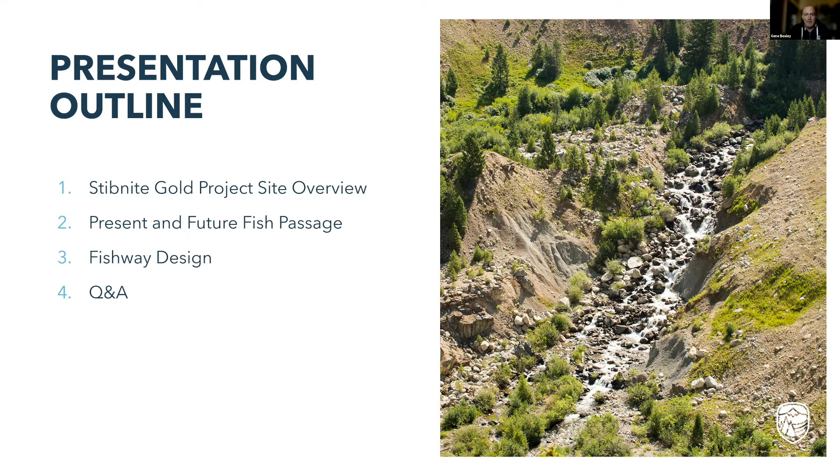So briefly, the project. Most of you probably know this, but it's in central Idaho, east of Cascade and McCall. One key constraint about building things at site is it's quite a ways in. We're about 37 miles from pavement or something like that.

And we'll be building an access road to get into the site using a few present Forest Service roads, but also some pioneered section. That's a whole webinar in its own right to discuss the Burnt Log Route. But anyway, suffice to say, we're pretty far into the hills and in some rugged terrain, and we'll get into some of that a little bit later as we talk about the tunnel and construction.

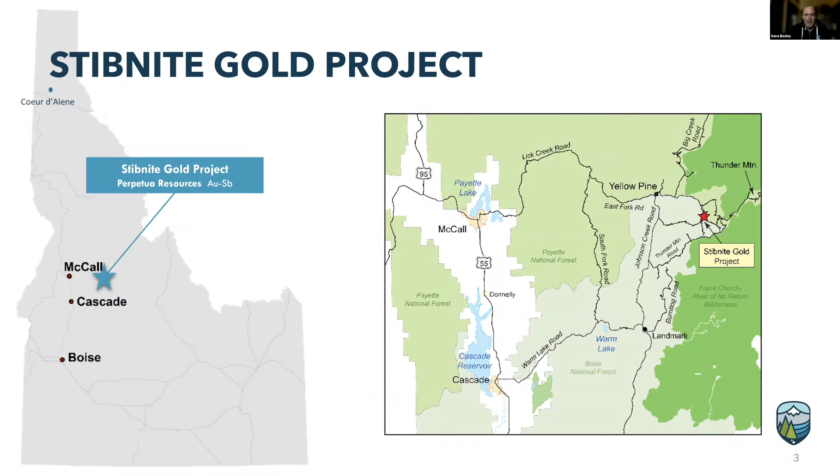The site, of course, has been mined for almost 100 years, off and on, and that's left a few legacies. We started out in the 30s, 40s, 50s with some pretty heavy mining activity associated with getting, in a lot of cases, war material. It was a major source of tungsten and antimony for the Allied war effort. Then the site settled down a bit after that, was abandoned and reactivated in the 70s through the 90s. That was focused really on heap leaching of oxide gold, and abandoned again, essentially.

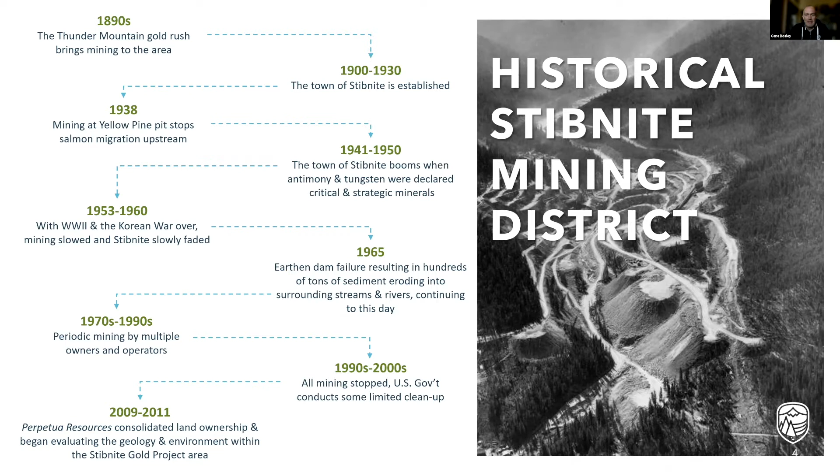And then some limited cleanup efforts were undertaken and left the site where it presently is, where it's better than it was in 1955 and better than it probably was in 1990, but still with a lot of work to be done. And we think we're part of the solution to that work.

Some of the key areas that we plan to address here focus mainly on the Yellow Pine Pit, but I should note there are a few others because they affect what the fish may find once they ascend. Up in Meadow Creek, you've got a lot of riprap channel, and a lot of water quality impacts due to tailings and spent heap leach ore.

And then you've got Blowout Creek, bottom right here, which runs chocolate milk in the spring still because it was the site of a water dam failure back in 1965 and still produces a lot of sediment. We plan to have a solution for all those, but those are details for yet another webinar. But the one I focus on here is really the Yellow Pine Pit.

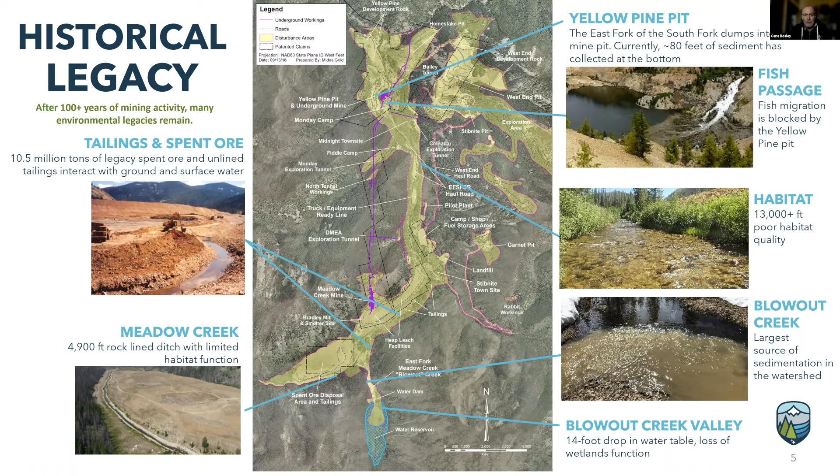So at the Yellow Pine Pit, the river was diverted around that pit first in 1938, and fish have not been able to ascend that spot since. And then in the mid-50s, that pit was abandoned, the river flowed into it and leaves the waterfall that you see there on the upper right image. And that's really the focus of the rest of our presentation here.

Here in brief is the sequence of what happens to Yellow Pine Pit under our plan. Right now you've got a pit lake and you've got a waterfall that's not passable in the upward direction by any fish that live here. In the interim condition, of course, we remine that pit. We take out a lot of the legacy waste that's in that area and remine it and expand it.

And to do that, we've got to get the river around safely, and that's the tunnel. And that will connect the fish up to spawning grounds, well in advance of the conclusion of mining. Actually, really from the get-go, as soon as we're built. And then finally, the restoration plan, of course, is that pit gets backfilled and the river restored to a natural condition across the backfill.

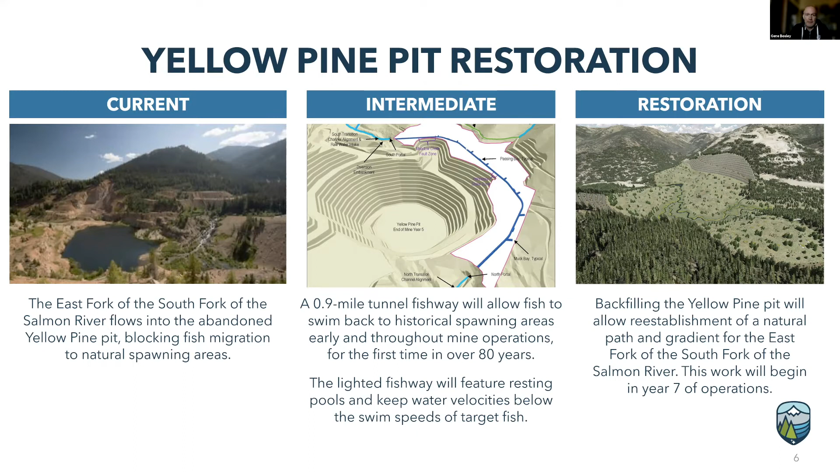But as to fish passage, Haley, anything yet? Probably not yet, but nope, you're good. Okay. All right, so we'll move on fish passage wise.

And then later on, of course, that was all abandoned and the river filled in the pit and started with an empty pit, much like this. And then, of course, since then, sediment's been flowing in. So it's changed a bit to the condition we see now, where you've got a little bit of a delta there on the right side of the image. But still a really tall waterfall, 80 feet plus, that's, again, impassable for any of the fish of interest here, really any fish at all.

And then the other thing I'll note, I mentioned Blowout Creek earlier. Right now, Blowout Creek's still making a lot of sediment, and that sediment gets stopped right here. Problem is, what gets stopped is the wrong kind. All the gravel settles out here, but the sand keeps on going, and the sand isn't necessarily what you want in your spawning gravels. So right now, this acts as a sediment trap for really the wrong kind of sediment.

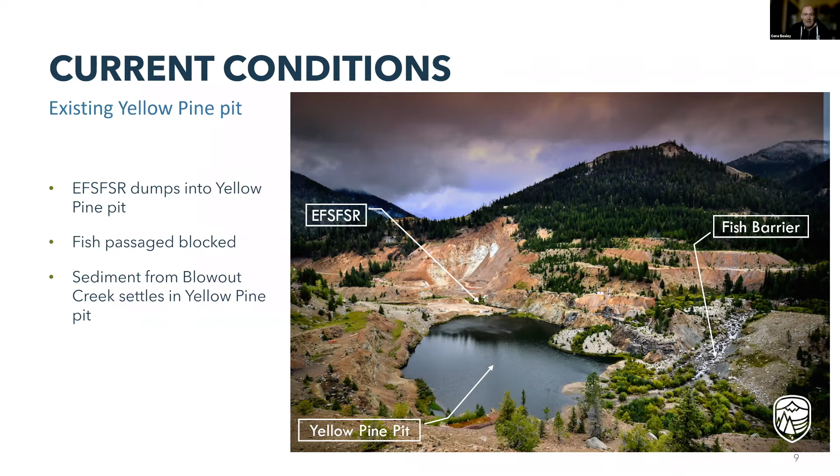And then during mining, and this is the same image as earlier, here's just a perspective of the tunnel with a little bit of a cutaway, 9/10 of a mile long, modest as tunnels go. There are plenty longer ones. And this tunnel will be built in year -1 of our mine plans, so the year before we really start ore production or ore processing.

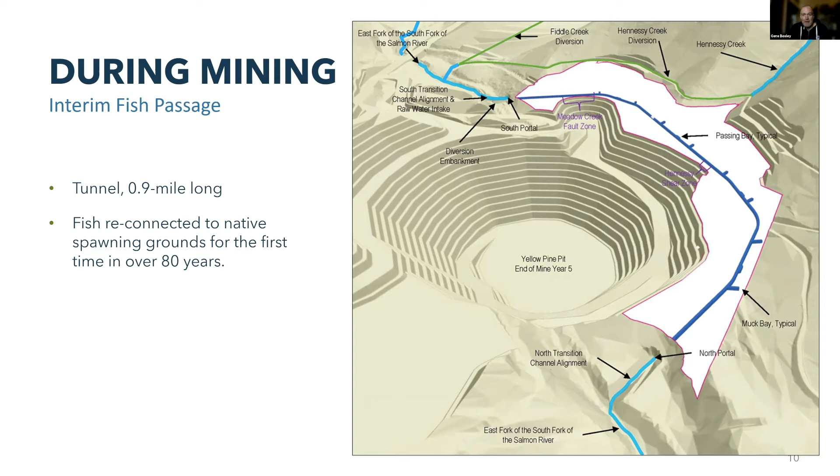And so within a couple of years of us receiving our permits and building, we'll see fish reconnected to the spawning grounds upstream, which really hasn't happened in about 80 years. The fish have gotten there in the back of trucks intermittently due to stocking programs, but no fish has been able to swim up there in about 80 years, since 1938.

Here, I just want to show you, again, this is the same pit, same image as before, rotated a bit. This is to give a little perspective of where the pit expansion will lie and how the sequencing will go. So this is the ultimate pit. This will be achieved in about year 5 of our plan. And then it will start to be backfilled. We've got to get that backfilled up to the river level before we can conduct the restoration, and that work is what will start in year 7.

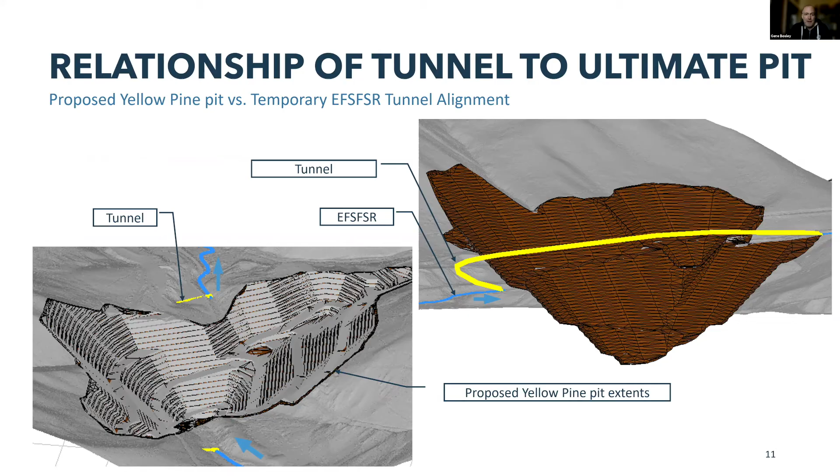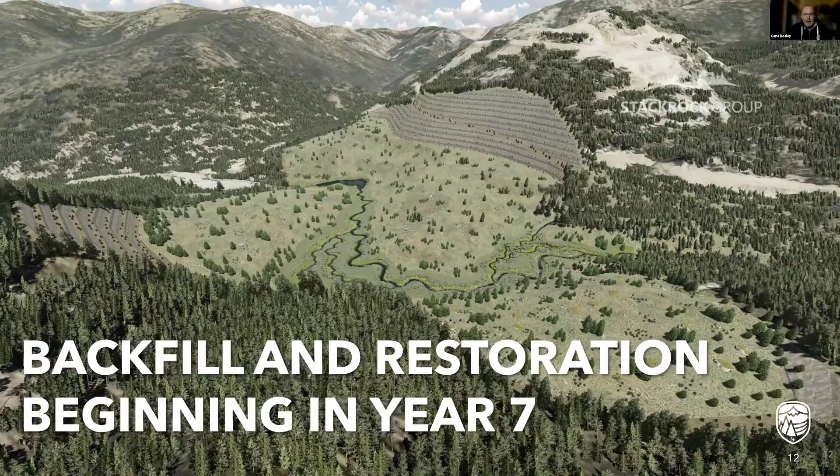Anything else general yet, Haley? Because then I'll get into the design elements here.

The question is about design elements, so go ahead and keep going, and I'll ask it once you get through it. Okay, great. And maybe it'll be covered, maybe it won't be in the course of what I'll say next.

So next up, again, this will be the design detail bit. So those not technical, bear with me. Hopefully there'll be something for everyone. First off, you have a lot of design considerations that are specific to our site. Some of them are general in any tunneling project or any fish project, but first off, you have geotechnical conditions. I'll cover those in a couple slides.

We obviously have rocks. It's a rock tunnel for the most part, but you've got to get through some legacy dumps and some glacial till on either end. And then once you're in rock, you still have to deal with faults. And the faults that the tunnel goes through are really the major controls on why there's an ore body there. And so we know they're there, and we've investigated them quite well and we know we have to handle that stuff.

The next part is, of course, this is on the river. It routes the river around. There's no reservoir. So that's the part that's maybe atypical for what you'd see in a fish passage project, because most fishways are designed to route fish around a dam where you have a large reservoir and you can essentially control the flow range in the fishway to a very narrow range. And that flow range is a very small proportion of what comes down the river.

In our case, the combined facility, the tunnel and fishway combined, have to pass whatever the river gives us. And that can be 8 CFS or that can be 700 CFS of flow rate, depending on the time of year and what kind of snowpack we had. And so that's a key hydraulic design consideration for the tunnel.

And while doing all that, we've got to have a fishway, not the whole tunnel maybe, but part of it has to be able to pass all the fish we're concerned with. So 3 species with different swim speeds, and the adult fish have to go up and the juvenile fish have to go down on their way back out to the ocean. So that again puts some hydraulic design constraints on us here.

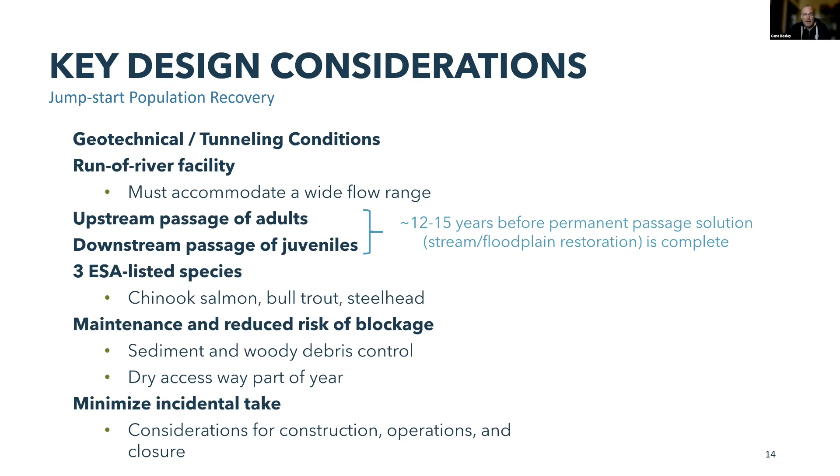Geotech, I know we got some contractors in the audience, so I'll cover some of this. Put this slide back in for you folks. So what do we have here? Well, near the portals, and that's the gray shading there, is really soft ground. It's glacial tills, alluvium, legacy dumps near both portals, particularly the north or downstream portal.

And then once you get into the rock, you're into Idaho batholith granitic type rocks for the most part, and a couple of major fault zones. You've got the Meadow Creek fault zone near the upstream end, and you've got the Hennessy shear zone near the downstream end. And overall, modest gradient, about 4%, considerably flatter than the adjacent sections of the river because it's a little bit longer route around. And it doesn't have a big nick point like the waterfall has.

We adjusted that profile a little. On the right-hand side, there's some shallow overhead cover and overburden on the downstream side. We flattened that downstream part of the tunnel to get underneath that and give us better tunneling conditions. That's why you'll see a 1.5% and a 4.5% section of tunnel.

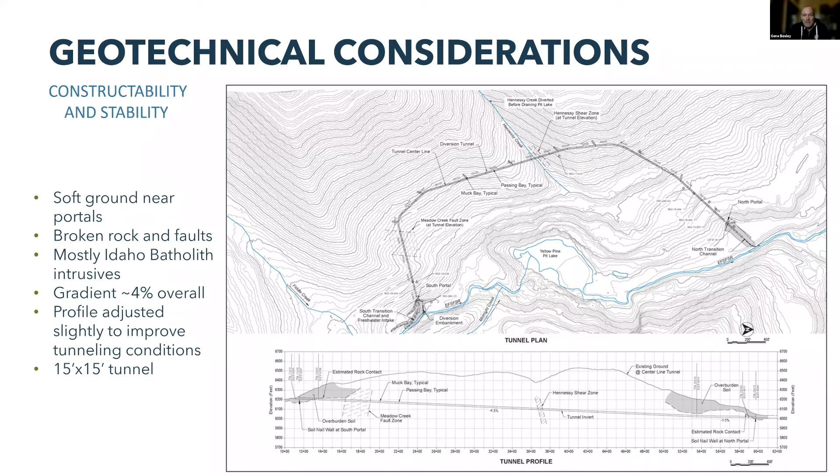Out of tunneling economics and the need for an access way, we settled on about a 15 by 15 section - 15 feet wide and a bit of a basket handle shape, 15 feet tall at the center. That gives us the best economics for digging. It also gives us plenty of room for an access way and a fishway without being too tight, because the next size down of typical equipment would probably be a 12 by 12. But 15 by 15 seemed to be the sweet spot based on our tunneling contractors' opinions.

As far as reinforcement, I mentioned we got bad rock in a few spots we know of. We're going through faults. That leads to half a dozen support types, 5 of them for rock, with varying degrees of rock bolting and shotcrete, and eventually structural steel arches for the worst parts. As the tunnel advances, we'll probe drill and pre-grout as needed to cut off water and stabilize ground. Soft ground tunneling is another beast entirely, and for that we have a pipe or spile canopy to get through it.

So we've investigated the tunnel length. We've drilled along it, and we've drilled into it from above. Generally, we think we have a pretty robust structural design here.

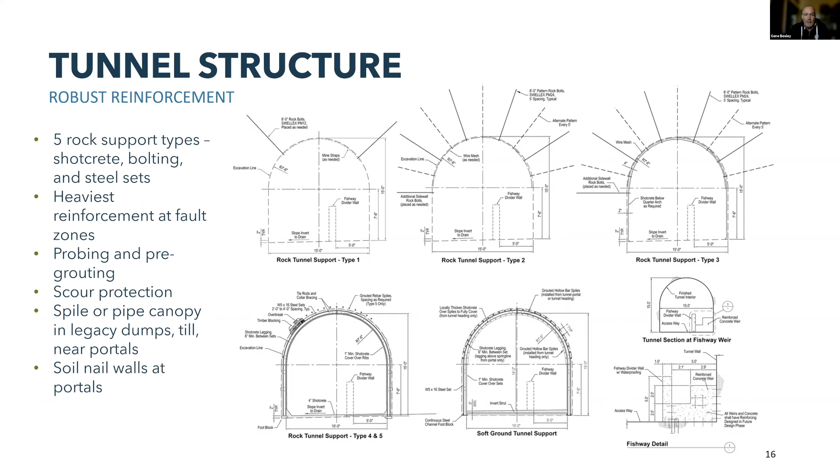The portals, of course, are straightforward. That's a soil nail wall like you'll see at a shopping mall now and then.

Anything pop up, Haley? Yes, so you covered it a little bit, but maybe just reinforcing - the question was, in regards to the tunnel structure, how you will be taking into consideration the varied geographic, but I would assume the geological conditions at site. I think you kind of covered that from the 5 components that you just went over.

Yeah, we've drilled the tunnel through a variety of methods. We've also drilled the adjacent deposit because the Yellow Pine pit's our chief ore body, our first pit. So we've drilled a lot of holes related to the pit itself, both for geological exploration purposes and for geotechnical purposes for pit wall stability. We've got lots of core, including oriented core, geotech, all that stuff for the pit. The tunnel, of course, is right beside it in the same rock, and actually less beat up rock, because all the alteration generally tends to be east of the tunnel, but as does all the metal.

So the tunnel itself has been investigated specifically, and that's included sonic, auger, and core drilling - both vertical holes hitting the tunnel envelope from above, as well as some angled holes, some pretty steeply angled holes, steep from horizontal. We've gone in 20 degrees from horizontal, raking along the tunnel envelope as well, for some really long core holes to cover as much as we could from the surface. So we've investigated the geotech of most of the tunnel envelope throughout its length with geotech holes of various types, various drill methods.

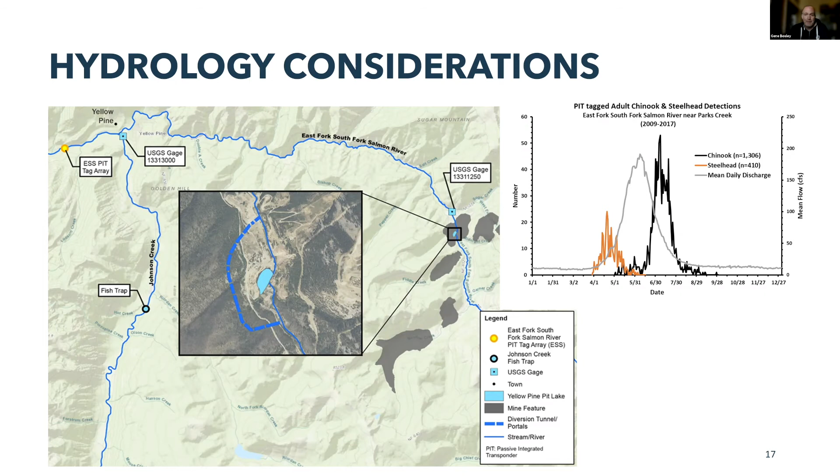The hydrograph of mean annual flow is in the middle. You see the steelhead show up early as the hydrograph's coming up when the snow melts. The Chinook salmon and the bull trout show up late, really on the tail out when the water's coming back down. That's a pretty consistent pattern, but it can be plus or minus a month depending on what kind of year you're having.

And it's not always just because of flow. So where that leads us is we have to consider, well, when do the fish show up, which fish when, and over what flow range does the fish need to get up the tunnel?

Again, this is pretty straightforward stuff because there's fish passage guidance for the whole Northwest that applies here, but we took a little more granular site-specific look at it because we've got the good data down at the PIT array by parks.

What we looked at here is originally we said, well, the Chinook are the perceived most important ones here, and they're most endangered. The fish that must ascend right here are the late arriving Chinook, and that was our original focus here. This is where you see we shaded - that was our real focus of design.

Knowing that we had a concrete lined tunnel of a 4% gradient, would we or wouldn't we get fish up if we hadn't designed it yet? This was early work. What it turned out is we actually covered the whole flow range here and very well. I'll go through that in a bit.

What we were doing first off was establish over the passage window, or over the migration windows, what are the 5th, 95th percentile flow range you have to design to. That's cookbook design work out of the marine fisheries guidance manuals. So that was the first step - look at the hydrology, figure out what fish arrive when and what flows they arrive at, and therefore what flows you need to design the tunnel to work for those fish. So that was step one.

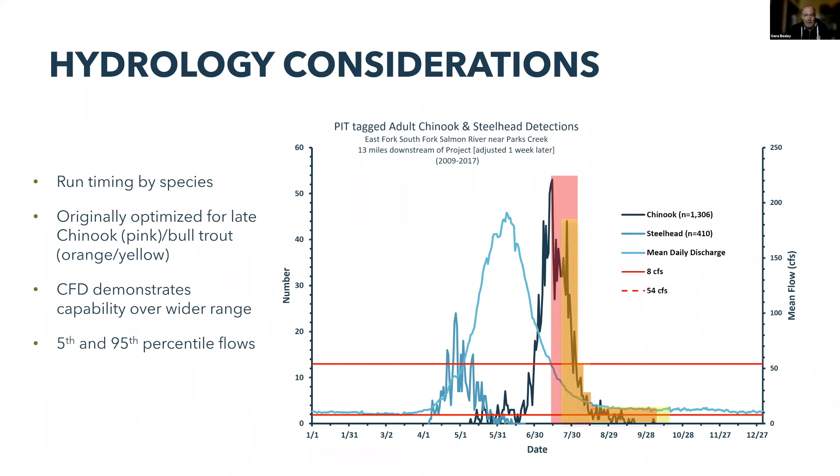And again, it's run of river, so we handle that whole hydrograph one way or another.

Next step was, of course, well, who's done it before? We took a look, and it turns out it has been done before all over the world - light tunnels, dark tunnels, long tunnels, steep tunnels, flat tunnels, whether intended for fish or not. Fish, especially salmonids, trout and salmon, can make it up tunnels and do. And we did document that.

That was kind of, again, one of our preliminary steps here. After that, of course, we got to figure out, well, how do we get them up? Could have a bare tunnel - that wouldn't work very well for us because we're on a river. Fish is not going to get up when there's 400 CFS in a bare tunnel with no other measures. We need some kind of structure.

And so we took a look at what those structures could be. There's weirs, there's slots, there's very detailed ones like the Denil passages, the Alaska Steep Pass. We looked at all of them. We even looked at the Whooshh system - for those of you who've seen the Colbert coverage on that, I highly recommend you find it on YouTube. We looked through all of them.

Really what popped up is tried and true concrete weirs or vertical slots. And of course, trap and haul is a fallback. But again, the idea here was to get volitional passage so the fish could swim back up on their own. Trap and haul remains as a fallback plan, but volitional passage being the goal here. Concrete weirs were really the winner, and they performed quite well. We'll see the whys and how we demonstrate that here next.

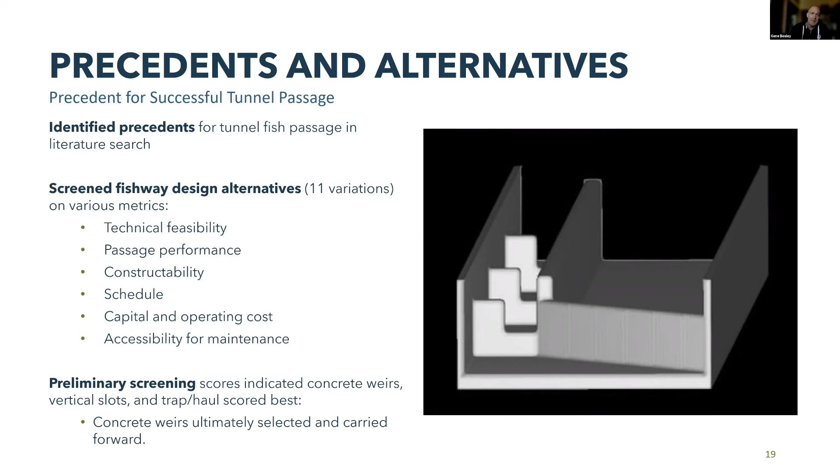And how we do that is, of course, some what's called computational fluid dynamics modeling - computer modeling. It's been around for a while, but it is now very easy and very advanced because computers have progressed quite a bit. This can be done on a desktop if you don't care too much about how long to wait for answers. But we had McMillen Jacobs, who are also the tunnel designer, so they deserve some credit here and lots of it. McMillen Jacobs did the modeling studies, and what we looked at here were - well, you don't model the whole tunnel.

You can't computationally, but you model all the key points. The tunnel is a repeating sequence of one weir after the other, so you look at just a short sequence of them. What we looked at here as well is the exits, right? That's where fish tend to hang up in the fishway, where they might decide they don't want to come up. So you look at the fishway exits, you look at all the control structures, and you look at the transitions.

I said that the tunnel slope transitions from 4.5 to 1.5%. So you look at that, and then you look at the whole flow range. We've got those statistically derived flow ranges from our gauge data, where we know we got to get fish up at 8 CFS, which is a flow depth criteria, right? The water has to be deep enough at low flow. And we've got to get them up, in the case of steelhead, at 239 CFS, where the water has to be slow enough at the high flows. So you have competing criteria there sometimes.

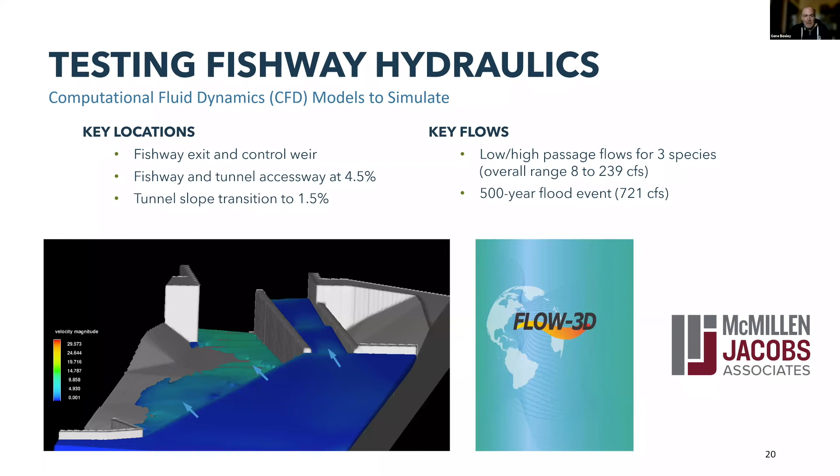The real focus is the fish flows here. And the image there on the bottom, that's the control weir. So that's how we get this to work. The killer app here, so to speak, is that the control at the headworks keeps the flow range in that fishway pretty low, even though the river range is pretty wide. And we'll show you what that gives us right here.

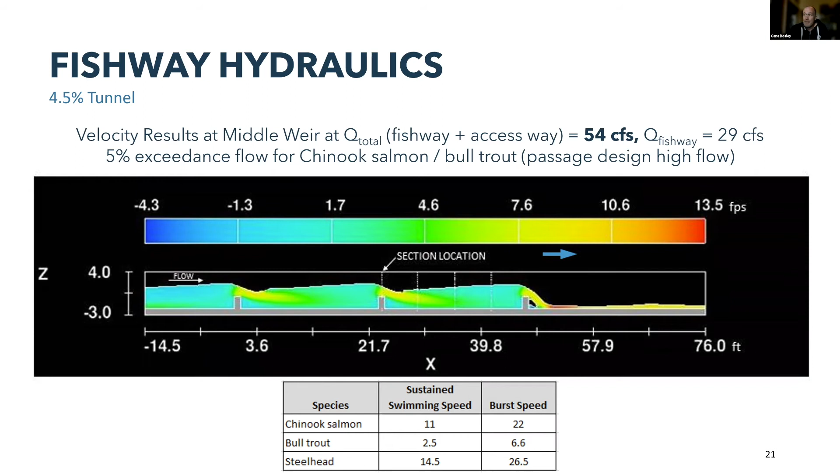So what we see here is a section through that middle weir. Average through that weir is 6.5. So even a bull trout can get through the middle weir at the highest flow a bull trout would ever experience on their way up the river, because of what time of year they tend to come up. This was a pleasant surprise for us because we thought, well, run of the river, high flow range, are we going to be able to get the bull trout up? The other ones we're less concerned with because they swim better, but we thought maybe we wouldn't. And it turns out even bull trout, we do well.

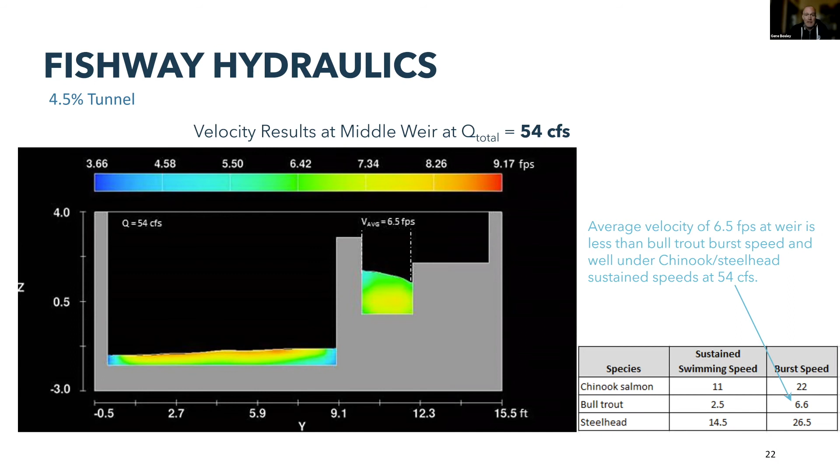And if you look at the other speeds there, these kinds of velocities are half the sustained speed of a Chinook and less than half the sustained speed of a steelhead. So it's really no challenge at all for the Chinook and steelhead. And that's at the highest flow a Chinook would see. Results turn out similar for the steelhead high flows too.

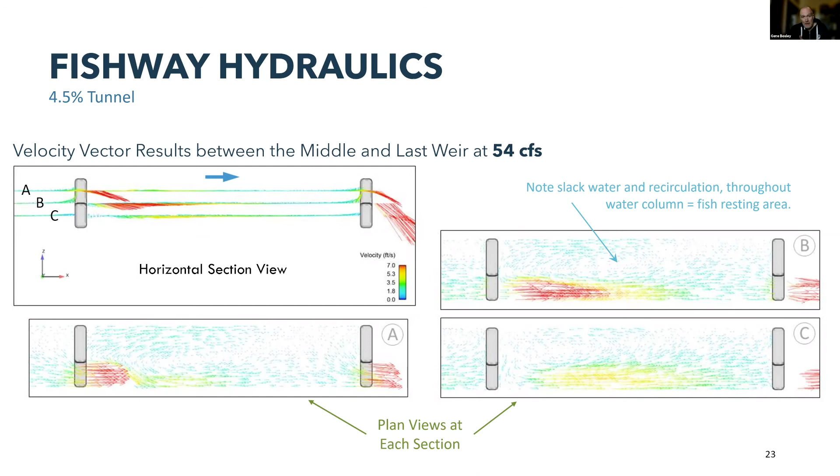But you also have 100% attraction flow, the term for the flow that guides the fish to say, hey, I want to jump or swim here rather than somewhere else where the flows might be different. So you've got 100% attraction flow and resting pools every 22 feet in the steep section of tunnel, with velocities readily achievable by any of the fish of interest.

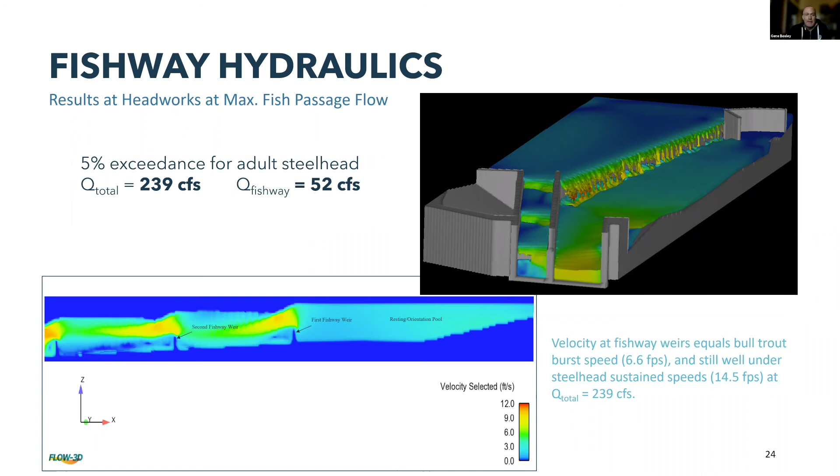And here we have a steelhead flow. This is spring runoff on the way up to the spring peak, 239 CFS in the river. We've got bull trout worthy speeds in the fishway, even though bull trout aren't trying then, but they could if they were there. And then of course, steelhead are the best swimmers of the batch, so there's really no challenge at all for a steelhead to get up even during the high flows in spring. So Haley, anything? Because then I'm going to jump into the fishway details here.

Yep, this is actually the perfect slide to stop on. Again, in the design and hydraulic models for the tunnel, you talk about juveniles and adults. So this question is specific for Chinook and bull trout: what is the plan to keep Chinook juveniles separated from hungry bull trout? That's right here, here, and above. The next two out of the next three slides will cover that.

Let's keep in mind too that we don't want to cause predation, of course, right? And we've taken measures to prevent it. We of course can't prevent it once they're outside our area of influence and down the river, and that predation is natural—those two species co-evolved. So some level of predation is inevitable and natural here. What we don't want to do is make it more than is natural, and we want to protect them as best we can while they're under our control. But once they're down the river, there's nothing we can do or really arguably should do about it.

And if it was determined by the services that, hey, we don't want bull trout here at all, because they're such different swimmers than the others, if directed, we could readily incorporate barriers to bull trout. A velocity barrier for bull trout that was passable by the others should be pretty readily achievable, but nobody's asked for that. As far as our consultation with the agencies, all three fish are to pass. And really, we get the cutthroat too—I don't talk about them, but westslope cutthroat are of interest, so we accommodate them, but we never sacrifice the three ESA-listed species' performance for the cutthroat.

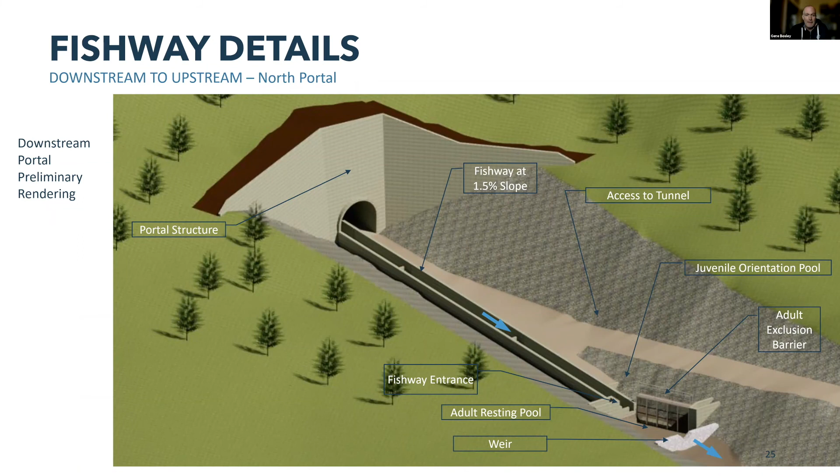Here's the inside of the tunnel. Again, there's a partition wall. We keep the flows split. We keep the water in the fishway at low flows, and then the water will share both sides in high flows, the amount being controlled by what lies at the headworks, which we'll cover.

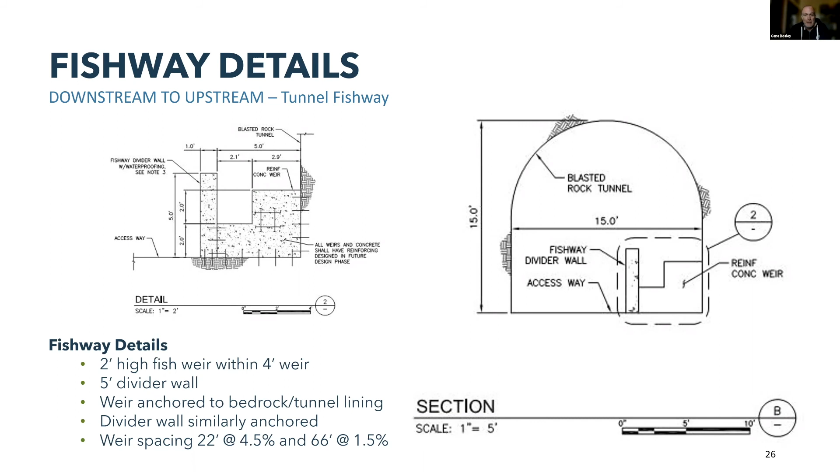You'll see another image of it in a second, but really this is just reinforced concrete weirs. They'll be slip formed where we can for smooth results and good productivity, but there's not a lot to see here, really. This really is a standard run-of-the-mill fishway weir type technology. And standard tunnel technology too, right? This is just like forming a jersey wall inside of a transportation tunnel.

And that's where we've got pickets to try to keep fish from going over the control weir. Those will work unequivocally for the adults because of the size of the pickets. We can't prevent the smallest of the small juveniles 100% of the time from going over, and that's why we have accommodation for them down at the lower end. But again, behaviorally, our fisheries experts think the fish are going to, for the most part, go down the main fishway, even the small juveniles. There's no reason they would want to be over the flow that goes down the control weir, and the time of year they descend shouldn't be at the maximum kind of flows.

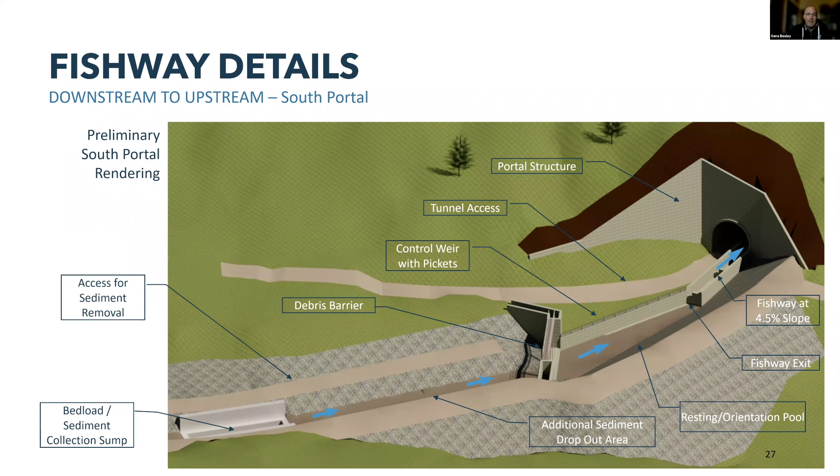And so here we are at the end. I didn't cover the detail here, but of course we have a lot of solutions in the works for some of the other problems in the watershed, so the fish have something to find when they ascend the tunnel. But the key points of the tunnel is we're looking at volitional passage for the first time in 80 years, right at the beginning of the project, and that'll give us a jump start on what we'd have to otherwise wait for if we waited till the backfill had occurred.

And then once we do finish the project up, and before we've ever left site, 2 more pits to mine, we'll be starting the backfill of Yellow Pine pit and get the river restored before we're even finished completely with the other pits. And again, there's a lot of habitat restoration in the plan as well, that's a whole other webinar, that they get once they get upstream.

And lastly, we've got proven tech here. This is standard conventional stuff. It may be put together a little differently in a different order for different reasons, but we've all got pretty high confidence that this thing should work both in the short and the long term. And I think we're down to Q&A.